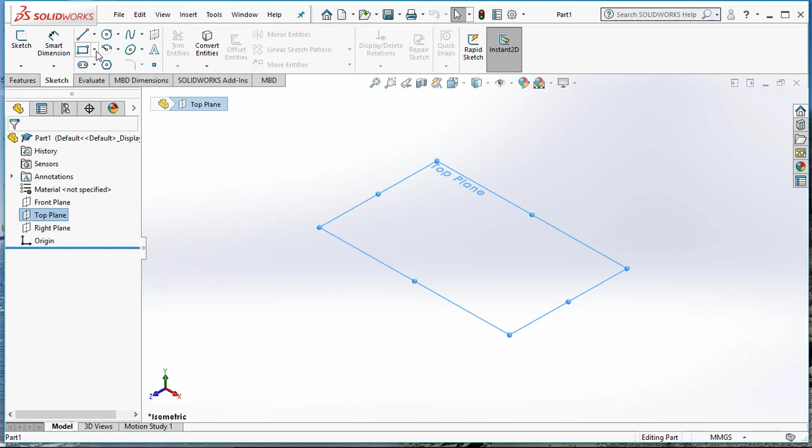The first thing that we're going to do in SolidWorks is start with a 2D sketch. This is almost always the first step. And specifically what I would like for drawing our first part is to start on the top plane. So I'm going to select the top plane and sketch and make sure that the sketch is located on the top plane. And then as I add to it, it will be in the right orientation for the part to look the way that I expect it to.

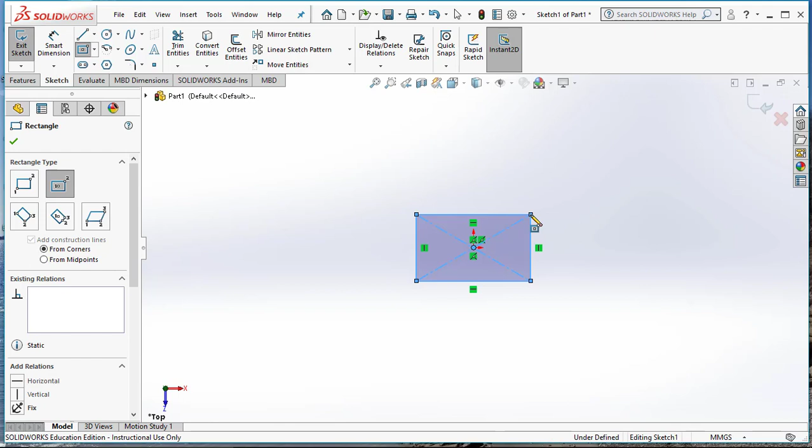Step 5 is to choose a centered rectangle. So I choose that from the rectangle menu, and I'm going to start the rectangle at the origin and pull it to really any size. It doesn't matter because we're going to use the Smart Dimension tool in step 6 to change the size to be 15.8 millimeters by 7.8 millimeters. Once I have the dimensions set, I click the green check mark to close the Smart Dimension

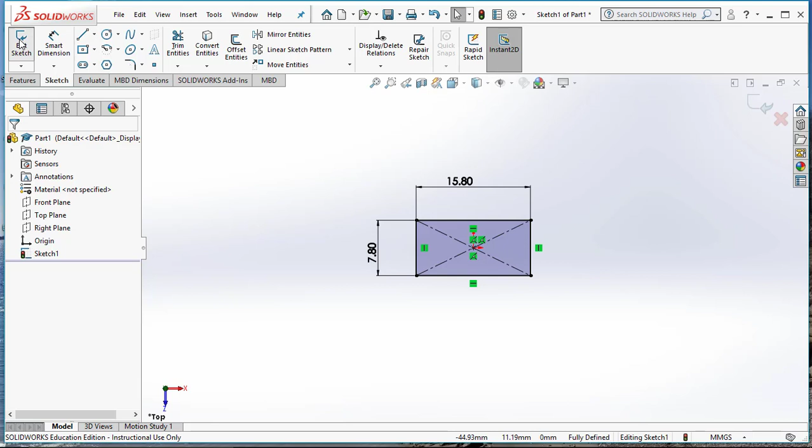tool and exit sketch. And now I go to the Features menu to extrude that sketch and make it into a 3D object. So I click Extruded Boss/Base, and I change the height from the default of 10 millimeters to be 3.2 millimeters, and click the green checkbox to accept.

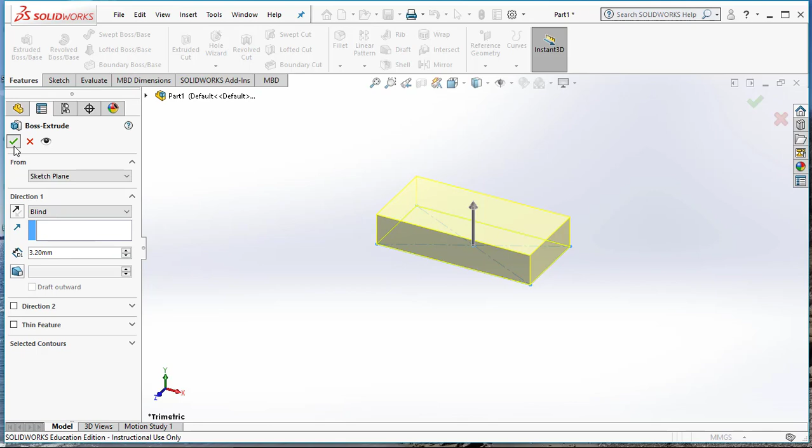For step 8, I'm going to do a new sketch on top of the box that I just created. So sketch, select the plane, and now I would like to add a center circle. I'm going to pull from the circle menu, grab a circle, and start drawing the circle at the center line of the rectangle. I can tell that I'm at the center line by the dashed blue line that appears. So I don't want to start the circle here or here. I only want to start it somewhere along the center line.

When I go to draw the circle, I will draw it to a random size. It doesn't matter the exact radius that I pick. I'll use Smart Dimension to fix the dimensions. But I need to be careful to not snap it to the edge of the rectangle. If I snap it to the edge of the rectangle, now there's a new rule about the size of the circle. So I want to make it small, just to be on the safe side.

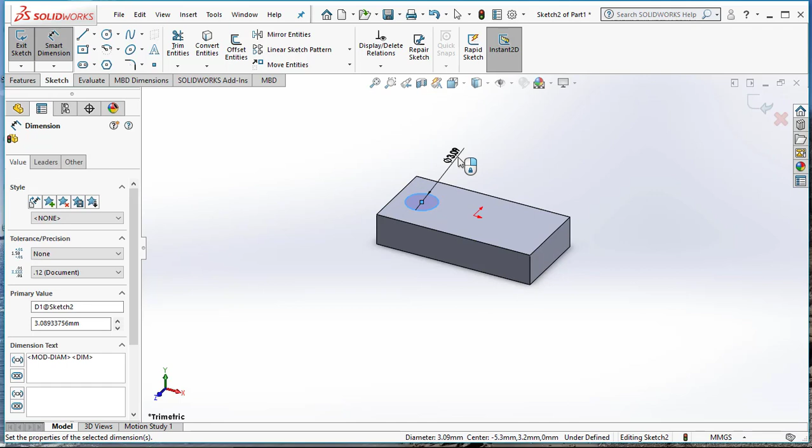Accept. And now I'm going to use Smart Dimension to set the diameter to 4.8 millimeters and the spacing from the center to the edge of the rectangle at 3.9 millimeters. I accept the dimensions, and now I'm ready for step 11.

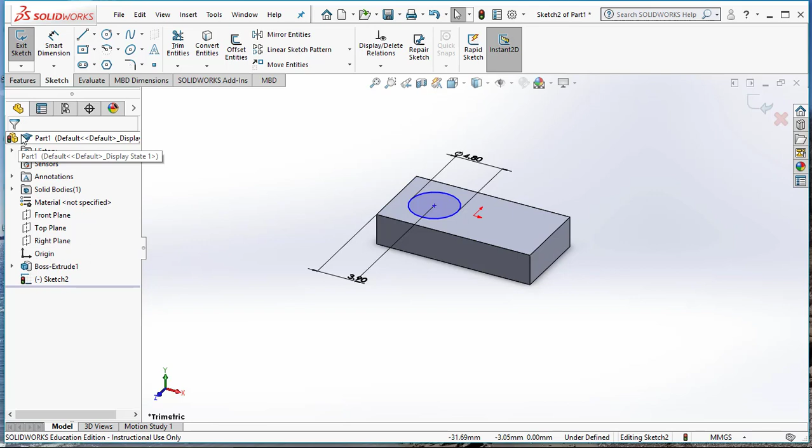I'm going to mirror this circle so that there are two circles on top of my brick. In order to use the mirror function, I need a line to mirror about. I want that to be centered on top of the rectangle, so I'm adding that to the sketch. You see that when I draw a line in SolidWorks, it expects that I want to draw several lines. Since I only want one line, I'm going to use Escape to turn off that function.

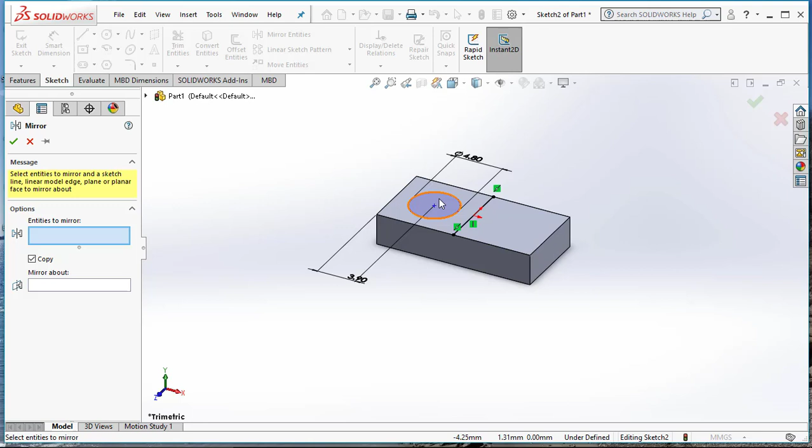And now I'm ready to select the Mirror Entities function, select my entity to mirror, the circle, and click with my mouse on Mirror About and select the line as what I would like to mirror about. Once I accept the mirrored circle, I can highlight the line, click Delete, and now I have two circles that are identical and they have the same geometry definitions. So if I change one of them, it will change both of them.

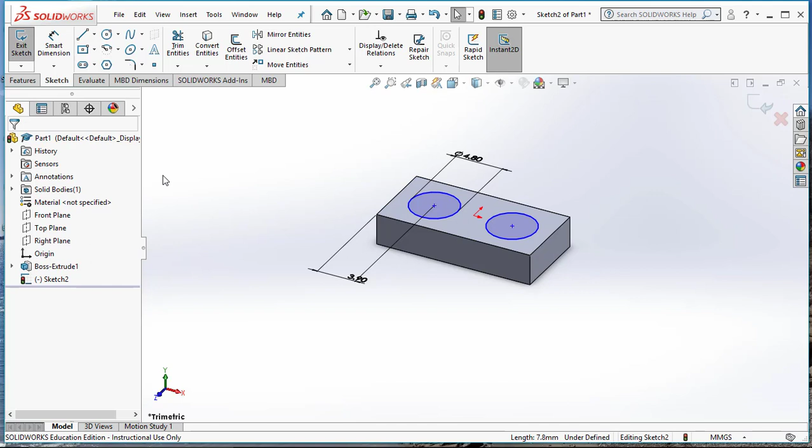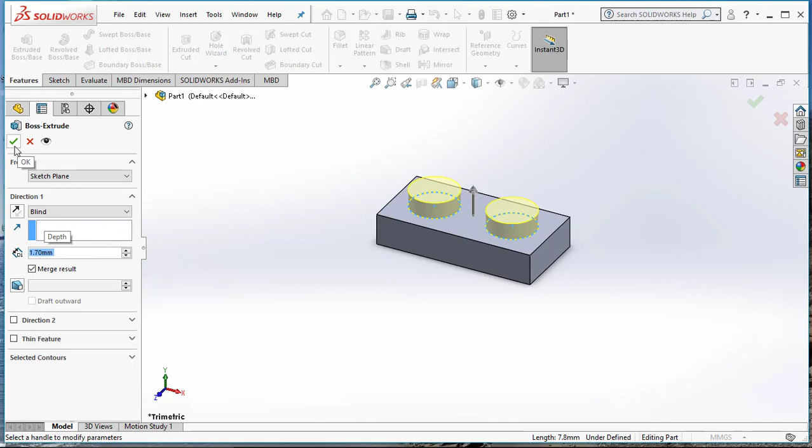I now exit the sketch. Just like we did to make the brick, I go to Features, Extruded Boss/Base. I want to extrude both circles, but I don't want them to be as tall as the brick. I want them to be 1.7 millimeters tall. Once I like the extrusion, I click the checkbox to accept the change, and now I'm ready to make a

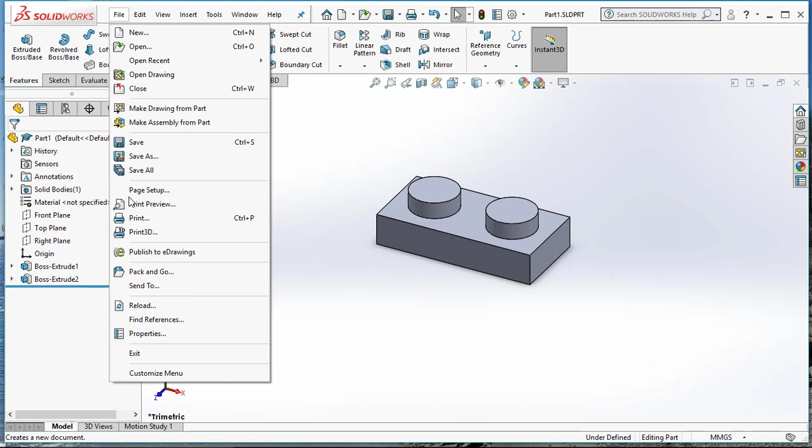drawing from the part. So I'm going to go to this tool up here to save the part, because I need to save it before I can make a drawing. Once I've saved the part, I can go to the File menu and I can Make Drawing from Part. I'm going to choose an A1 size for my drawing.

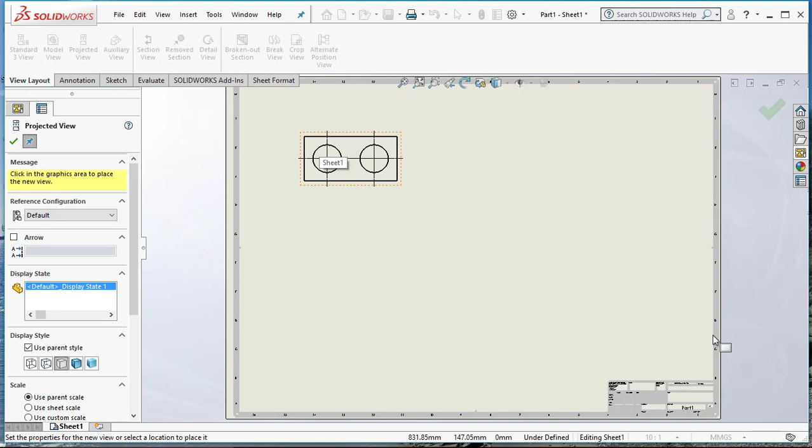And I can drag views onto the drawing sheet. So I would like to import annotations. And I'm going to drag in the top view. I want a top view, a side view, and I have the 3 drawing views that I do want to include.

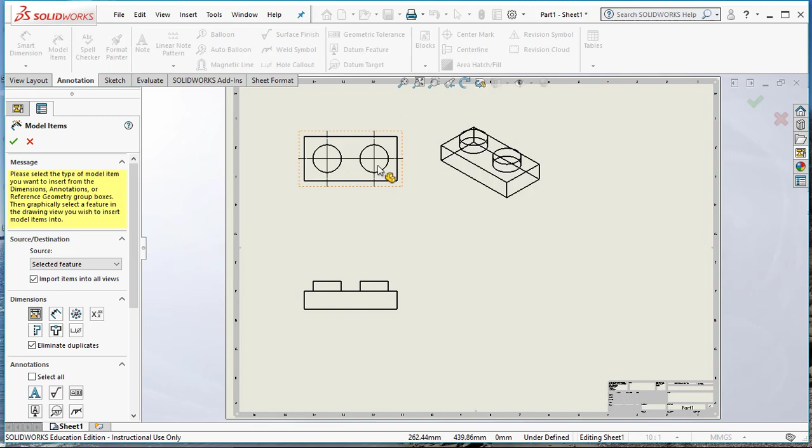Now to add dimensions, I'm going to go to Annotation, Model Items, and import the dimensions by clicking on each of these views. You can see the dimensions show up. And then last but not least, I'm going to accept those items and go to Sheet Format, Edit Sheet Format to edit the information in the bottom right corner.

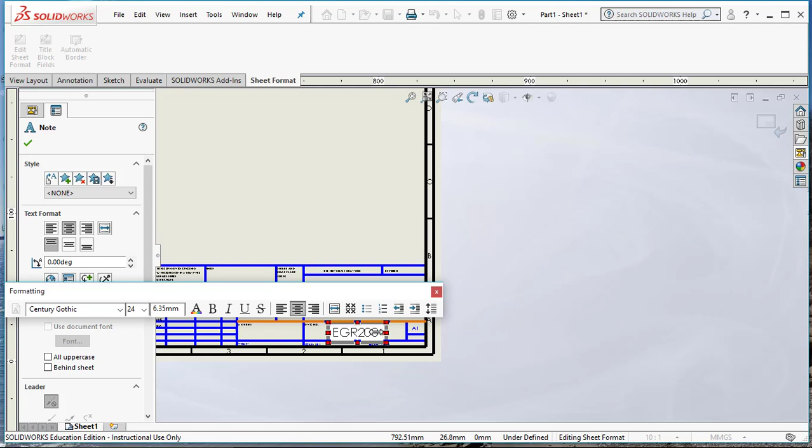I can do this by zooming in and clicking on each of the parts that I want to change. So I would like the part name, instead of being Part 1, I would like it to say EGR200 Part 1. I would like to edit the material. I'm going to zoom in a little bit so it's easier to read. And once I click Edit Text, I can say material is ABS.

I'm going to add my name. I'll just put my initials and the date. January 29th, 2020.

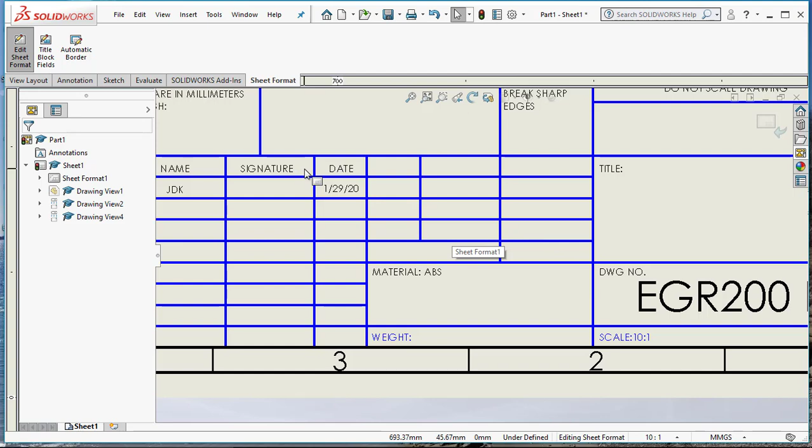So the title, initials, material, and date are the only 4 things that I'll ask you to include. Once you've included all of those, you can exit the edit sheet, you can zoom out, and you can see your completed drawing. In order to turn this assignment in on Canvas, you should save it as a PDF file. You can do Save As in order to select PDF as one of the options. And you can save this as EGR200 Part 1.